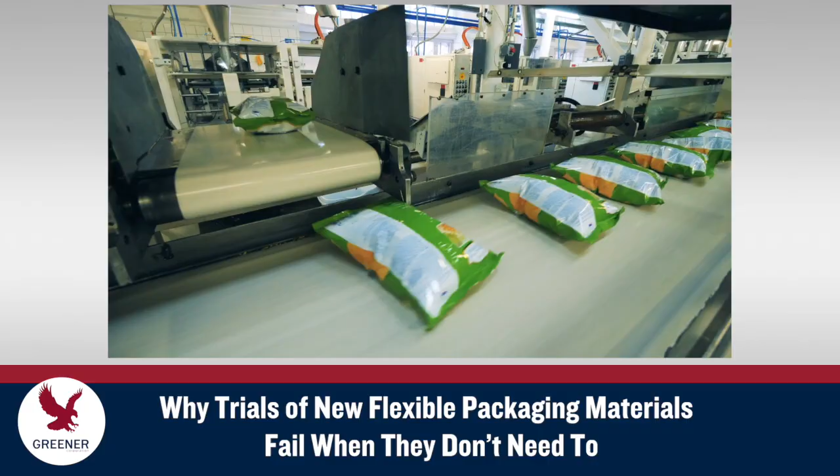The failed trial of a new flexible packaging material may have more to do with the trial process than the structure of the material. Problems often occur when new materials are trialed on machines that retain adjustments and components designed for the previous material. This is especially true for new sustainable structures with increased heat sensitivity and narrower seal ranges that often require specialized sealing jaws and optimized machine setup to run properly.

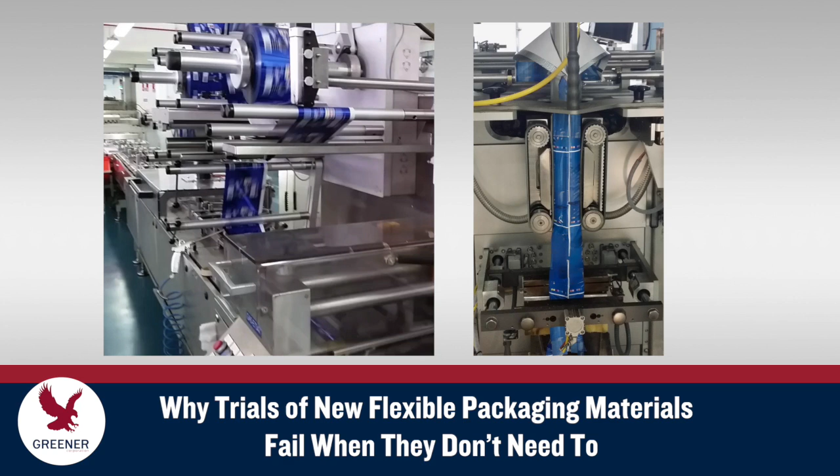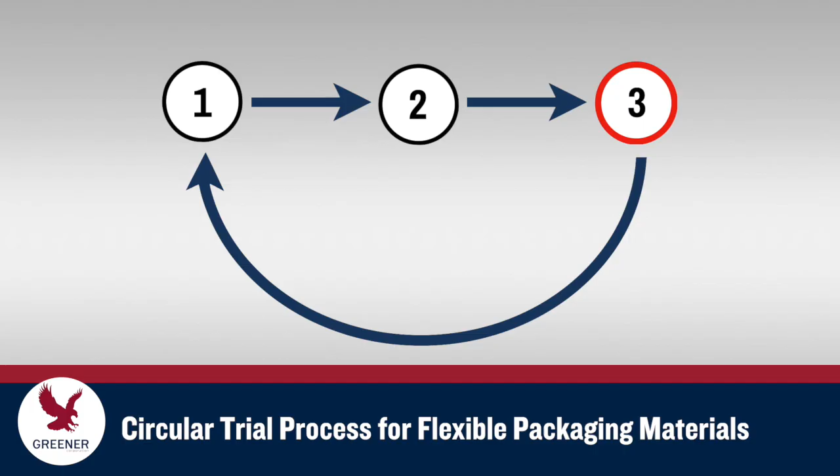This Greener Tech Bite compares two different trial processes for flexible packaging materials on flow wrappers and vertical baggers that often yield contrasting results. Packagers, material suppliers, and converters often get caught in the following circular trial process. A material supplier or converter works with a packager to specify a material that will help them reach their corporate goals and provides material for a trial.

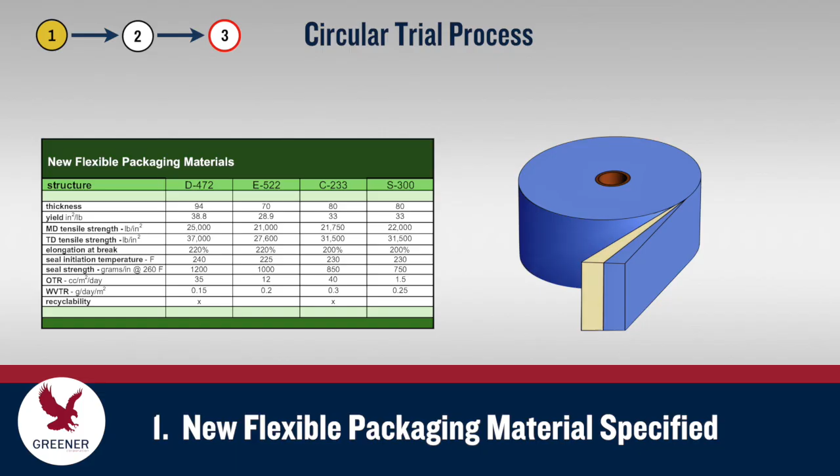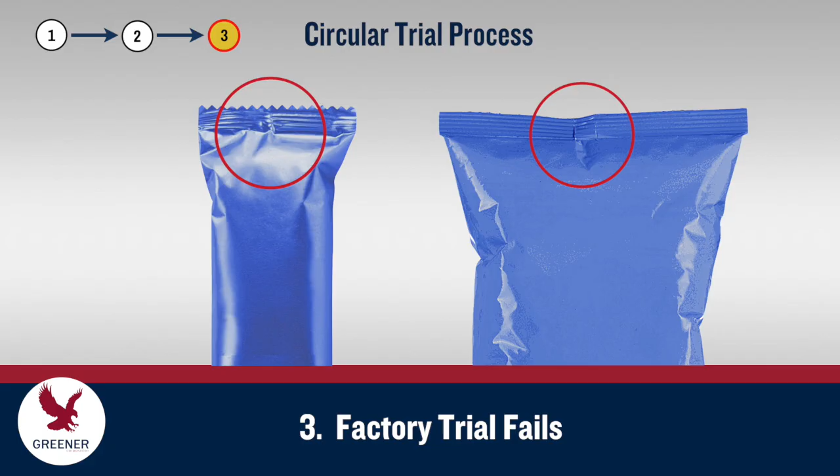The packager trials the new material in one of their factories, utilizing existing sealing jaws and only making minor adjustments to their flow wrapper or vertical bagger. The trial is unsuccessful. They are unable to meet seal integrity and/or machine speed requirements, and the new material is deemed a failure. The packager's process returns to stage 1, and the material supplier or converter provides a modified version

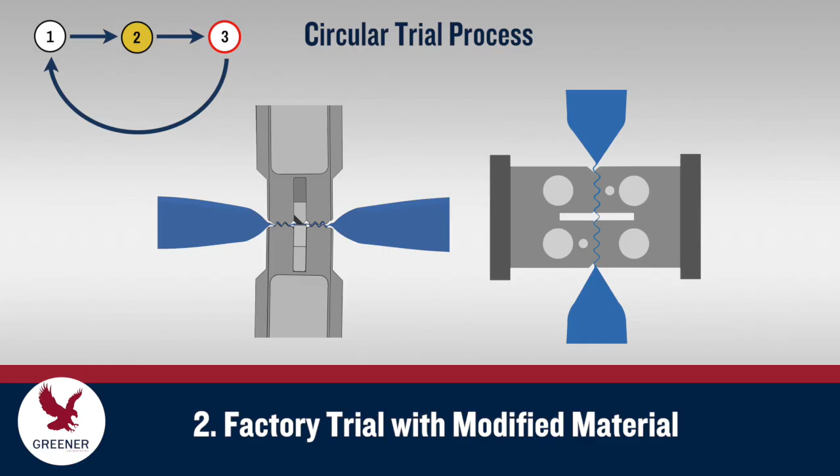of the new material. A second factory trial is run with the modified material, again using the existing sealing jaws. Results improve slightly, but seal quality fails to meet quality standards at the machine speeds necessary to meet production requirements. The process again repeats and may do so multiple times before a successful trial occurs or the project reaches an

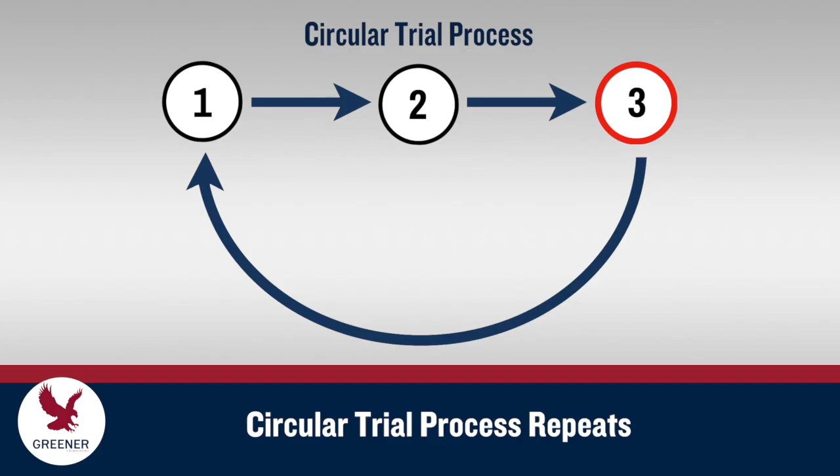impasse. The cost is high, not just monetarily, but also for the long time it takes to develop and approve a new material. When forced to rely on this circular trial process, packagers often don't meet their goals in the desired time frame or are forced to settle for substandard package quality and/or productivity.

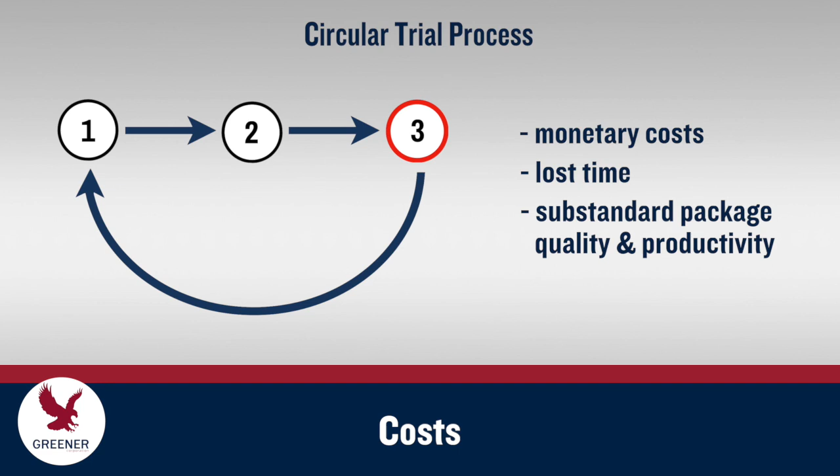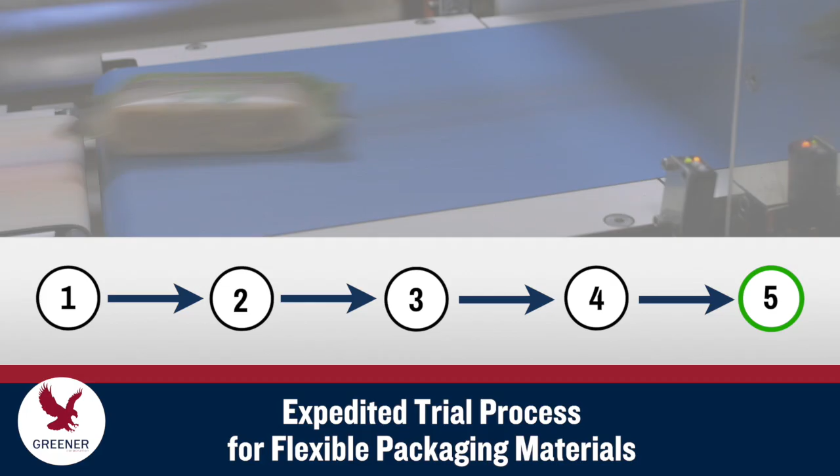With Greener's expedited trial process, we partner with packagers, material suppliers, converters, and OEMs to prevent the repetitive efforts and failed results of the typical circular trial process and reduce the time required to move from project inception to successful trials. Through our expedited trial process, the packager works with the material supplier or converter, often with input from Greener, to specify a material that will help them reach their corporate goals.

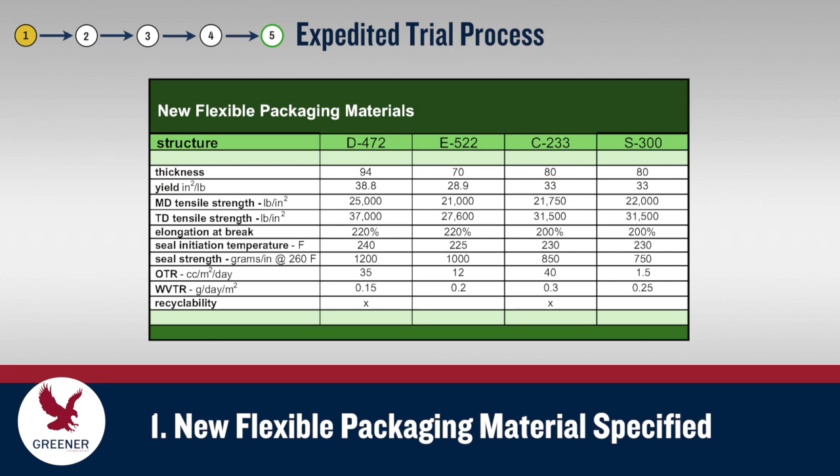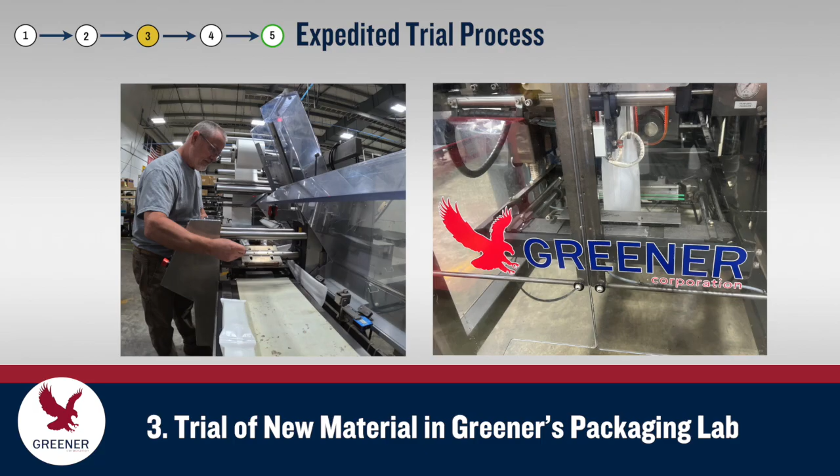The packager and/or the material supplier or converter partner with Greener Corporation for the trial process. They send us rolls of the new material. Greener trials the new material in our packaging lab on a horizontal flow wrapper or vertical bagger, where sealing jaw design and machine setup are optimized to achieve the packager's desired results.

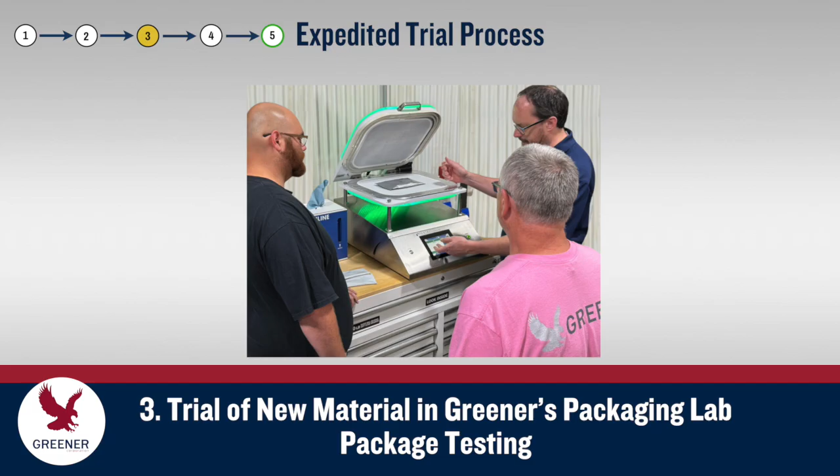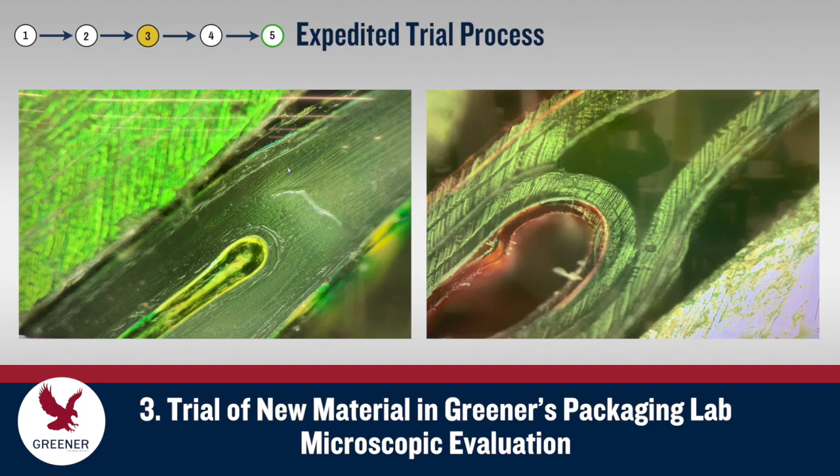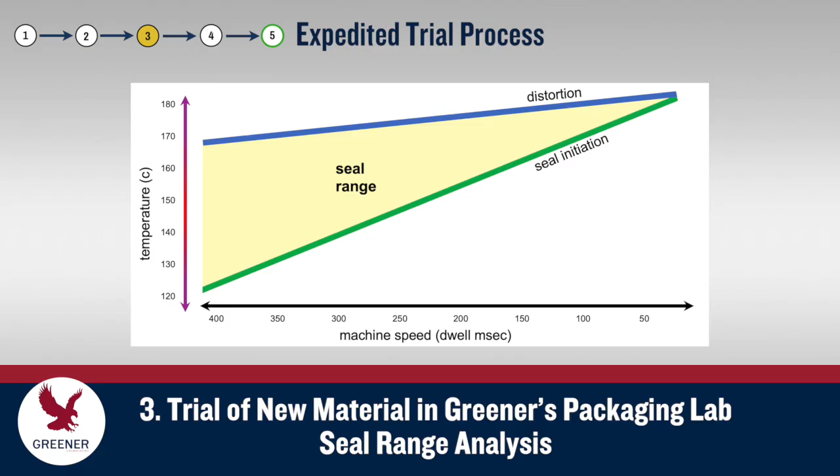Packages are tested to ensure they meet the packager's quality standards. Test methods include the vacuum decay test for seal integrity, the seal strength burst resistance test, and microscopic evaluation. A seal range graph is created to determine optimal temperatures and machine speeds for the material. Seal range can be used to identify potential modifications to the structure that could increase productivity or reduce material costs.

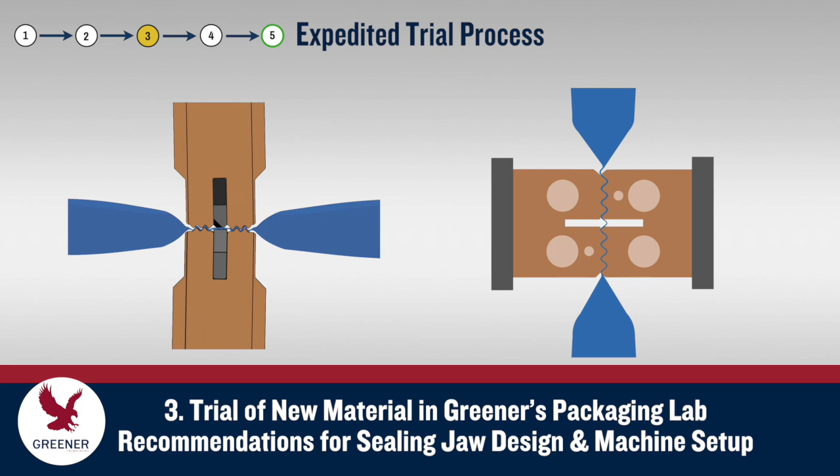Using optimized sealing jaws and machine adjustments, the trial succeeds. Recommendations are provided for sealing jaw designs and setup specifications on the packager's flow wrappers and vertical baggers. A factory trial utilizing these recommendations is run with the new material.

A Greener technical specialist attends the trial to help optimize packaging machine setup and ensure that factory trial results match those achieved in our packaging lab. The factory trial produces successful results.

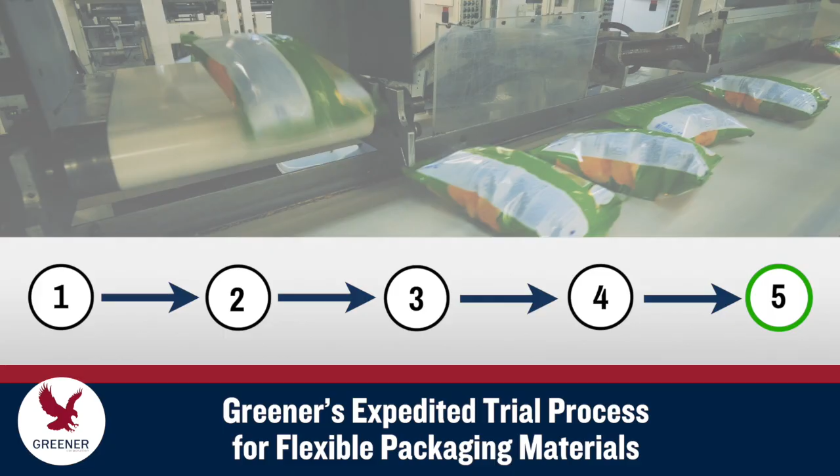Greener's expedited trial process for flexible packaging materials reduces costs by shortening the new material development process and by allowing packagers to maintain seal integrity standards and production levels. Trials of new flexible packaging material often fail when they don't need to.